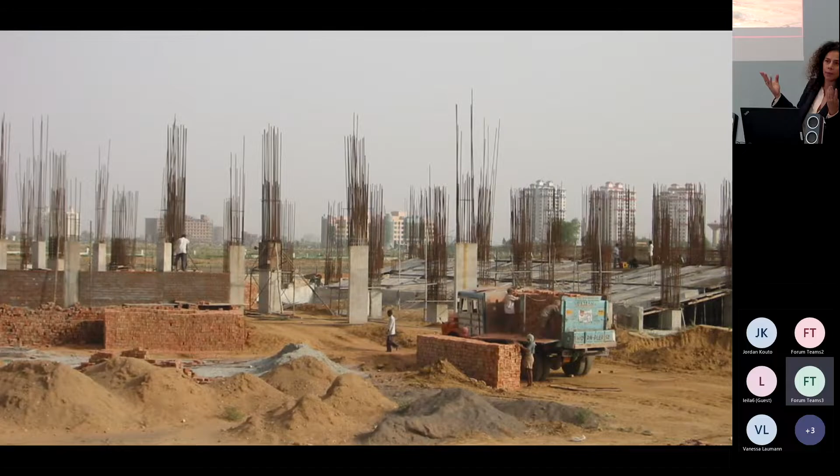What I'm concerned with now is all the knowledge - take this brick. The same brick was able to build huge castles, look at Notre Dame. It can build, look at the Duomo, look at Hagia Sophia.

If you look at the span or the heights we built in early New York buildings, if you look at Guastavino's work, what a brick was able to do. Today, a brick is only allowed to be infilled and then plastered over, as if it's a junky material that shouldn't even be allowed to carry any weight.

So these are the habits. When we look at them, it means humans have achieved some intelligence, and for some reason we are forced to be dumber than we are in how we apply things. That's what I want to ask.

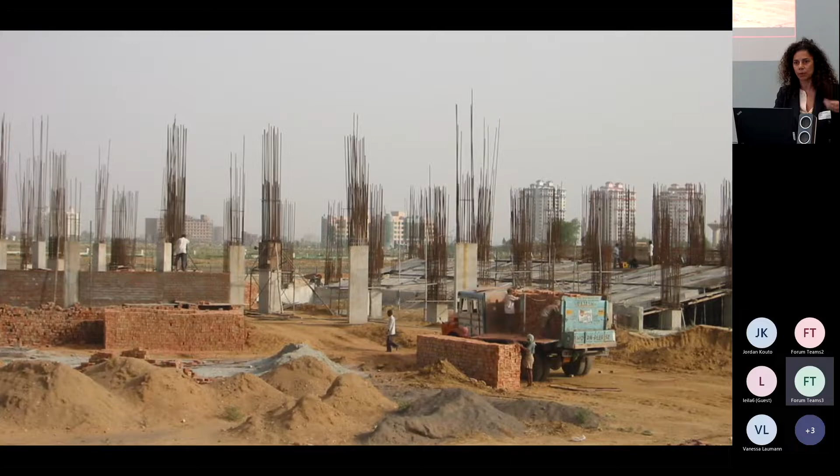We are in such a hurry to work and produce that I often ask, when I began my practice, what is the point of doing efficiently things that need not be done at all?

Maybe like during COVID, we saw that the damage got less. We didn't go to work, nothing happened. I mean, we got sick, there are many bad things that happen. But a lot of bad things didn't happen because we just were not allowed to do certain things.

So that should make us think - it's also funny, if you look at how we took something so seriously and found out it was not at all important. So let's be light about it and drop all the baggage, is what I would say.

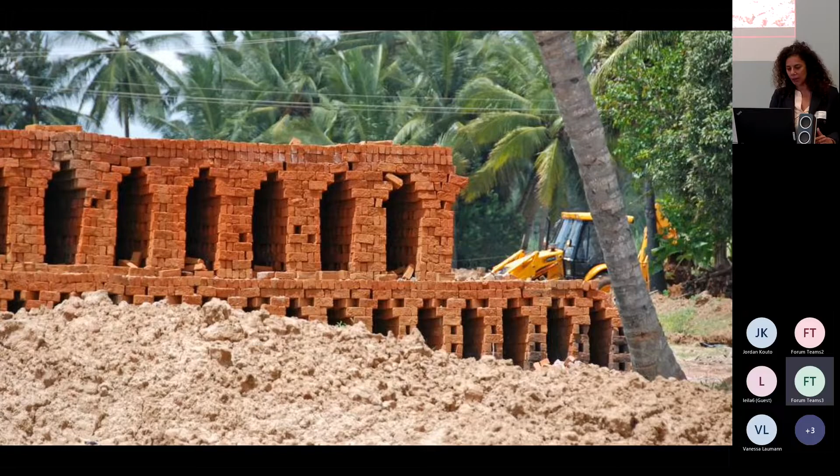I will just give an example now. I think I've used up my half an hour in the introduction. No, because I'm not such a big fan of prepared speeches - I like to be here and meet people and interact naturally. So when the time is up, we'll stop.

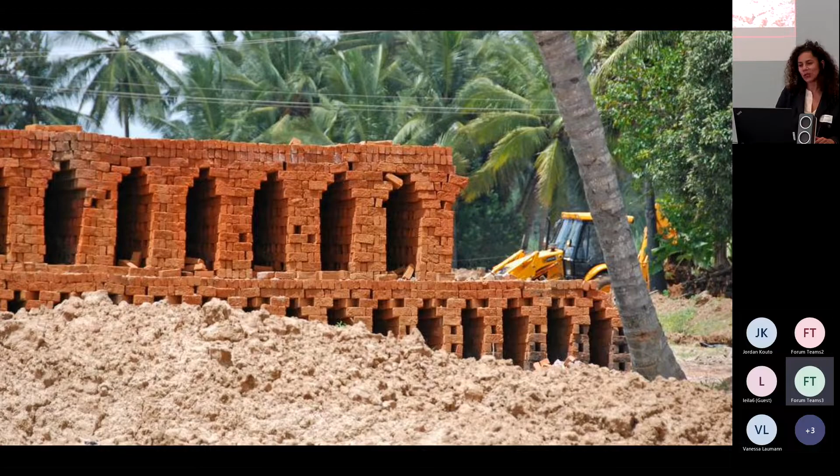So these are some things - when I started my practice, I graduated from school. We already knew there was an environmental crisis. This was in 1989, so we know how long ago that was.

I took the time to think before I act, and not to work in offices or do jobs where I felt it was not good for me, for them, for no one, and only for the sake of paying my rent. No, I'd rather live more humble, more simple. So while I downgraded my standard, my aspiration was very high. I started the adventure of what to do with the rest of my life.

Through that, I started observing - if I just take the material of brick, I studied many materials. I started looking at how brick is produced. When we look at production from an industrial catalog and think about how to rethink materiality for sustainability, the very first question begins: how is the material even sourced?

From where is the clay? What is the quantity? Sometimes I realize it's the quantity that's important, not just whether something is a good or bad thing. It depends how much of it you're doing and whether it's within human scale or not. So a lot of reflection, but I started realizing that no matter which material is produced, literally all materials are deeply affected by the territory from where it's sourced.

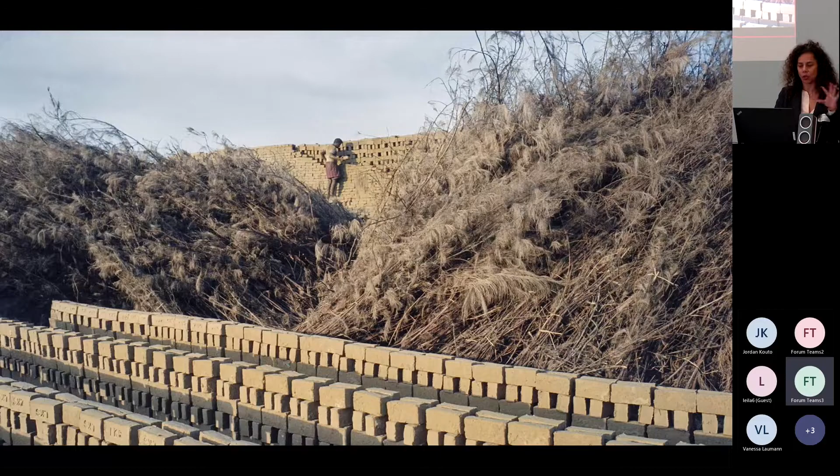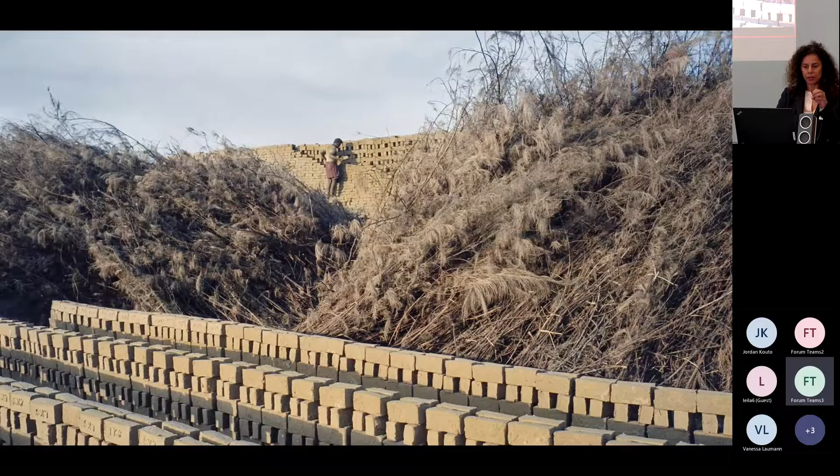So in India, for example, the clay bricks made by hand are made by the same people who are actually rice farmers. In some season where the clay collects, they will make bricks. In some other season, they are growing these kinds of plants to eventually take them as fuel.

So it's a kind of reforestation. And with the wood, not all the tree is cut, but the thinnings, which always have to be cut when you create a forest, are used. So there is a cycle.

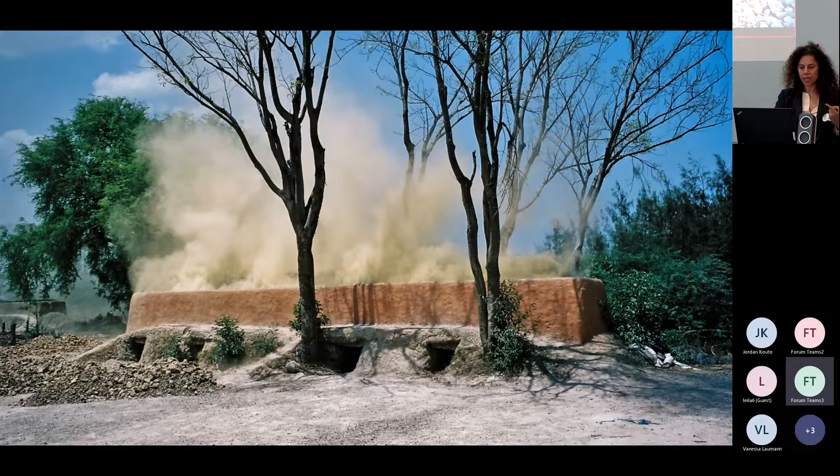Similarly, in lime making, there is a cycle of humans doing many different jobs in old civilizations to produce a product. A farmer's whole cost isn't just the 8 hours he worked every day, otherwise the rice would be too expensive. The same guy is also making bricks, also doing farming. There's a season, and sometimes he's doing this, sometimes that. Through all this activity, the economy sustains itself and the brick is available at the cost at which it is available.

And I realized that if you remove lime makers, if you remove brick makers, if you decide to use factory brick or Portland cement instead, these entire communities are wiped out overnight, because we got our architecture degrees and we are taught to prescribe a standard bag of cement as opposed to what is lying around.

So I think because we don't know how to use what is lying around in abundance and surplus - why? Because it takes time to use it. That's what I'm talking about, time as a resource. We would rather say, no, we have no time, because in the West, they created a slogan: time is money.

I really question this slogan. Time is our whole life. It's not that time is money - it's wrong to think that. In this society, time costs money. Suppose I help somebody for an hour, it costs that money. But that doesn't mean I should stop.

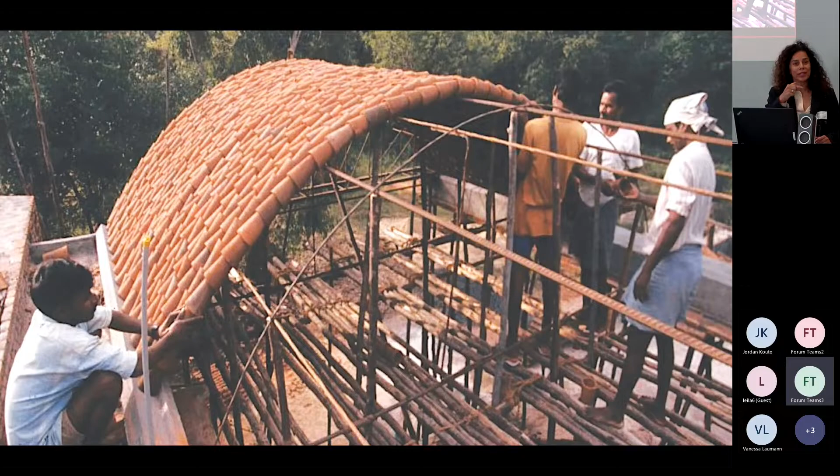The potters community is getting sidelined, losing their livelihood due to urbanization. Nobody wants clay pots anymore. But I thought if we can make building products out of the skills we have in society, it's okay if we don't use pots as pots anymore. We can make roofs with the knowledge that already exists, reinvent it, and produce highly insulated ceilings to give secure employment and improve local economy, producing material not just in factories.

For hundreds of years they were making things in the field. It costs nothing to just make. Of course, our standards may not allow that they work outside, but they are actually more healthy like that, not stuffy in a factory. They are outside their homes doing artisan work, and we are firing them with coconut shells and so on.

In the green building standards of the West, they don't differentiate when they say a brick uses XYZ kilojoules, whether it's coal or coconut shell. For them it doesn't matter - they are interested in quantity, never quality. I find it troubling, but it makes a big difference where you're taking the fuel from. These things should be seen holistically.

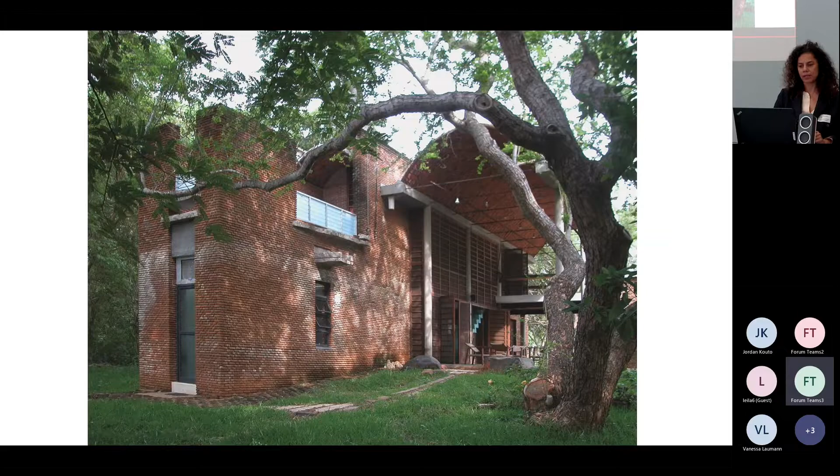With this kind of collaboration with masons and craftspeople, we produce some kind of architecture, and it's infinite what we can still do. Many people call it vernacular architecture because it looks like the colors we're used to, but actually these are highly engineered solutions.

I have even used the traditional pots which nobody buys anymore, but craftsmen still make out of tradition, for rice cooking, like a paella kind of dish. So I started using them as filler slab, like a lost shuttering - a Verlorene Schalung - for the concrete, which uses about 30% of the steel it would normally need.

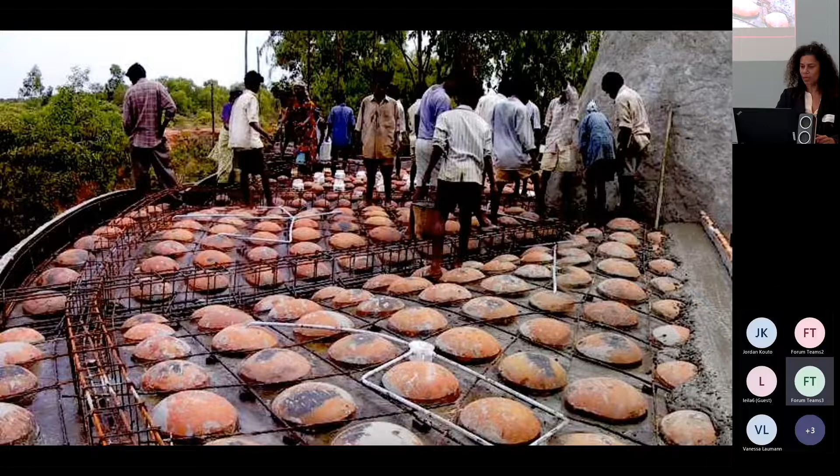So there are many kinds of things possible once you decide that if a modern solution is not good enough, we are not going to use it. If you just allow yourself to think for one or two more weeks in the design, what can we do? Each day we find ideas of what could be done, and then we follow it up with experiments.

So this is some of the architecture that I produced.

In the meantime, I myself lived very simply, because I had to reduce my costs of life. The more I gave up, the less I needed, and the more I actually liberated my time. Because if you're spending 60% of your salary on rent or paying back a bank, something is wrong in that whole calculation.

Many times we find it inconvenient to question the whole thing, because we think we have to solve the whole world's problem. I thought, let me just solve my own affordability problem and go from there one by one. Then I applied some of the successful strategies to other projects.

I stayed in a way many Indians, in very simple settlements, stay. But I had a motorbike, which cost more than the house maybe, and I had a solar panel also. Those were my two expensive high-tech things.

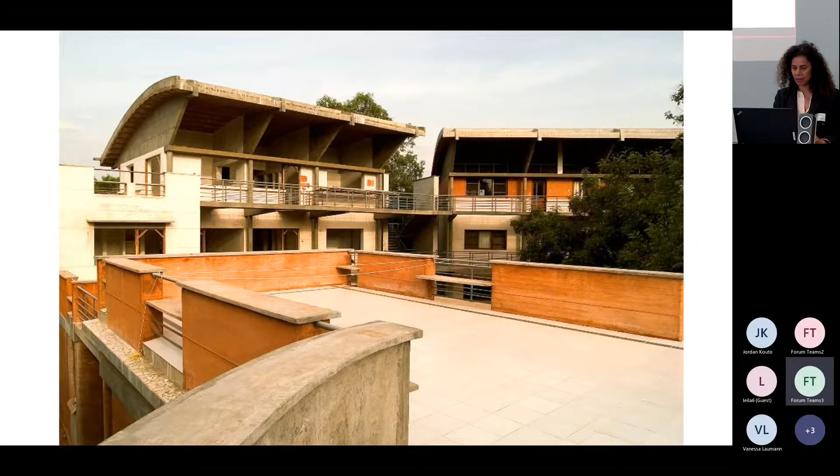So I have to go a bit faster, because I've wandered in unexpected directions. But I started using certain techniques.

I've investigated all kinds of materials that I've come across. This is an urban eco community, and I put the stress on the word urban. It's a co-housing, because I think the future has to be urban so that we can reduce distances, reduce sprawl, so that cities become walkable and infrastructure is efficient.

But even these, you see, these are terracotta roofs that are insulated, and they are partly prefabricated. There's a whole lot of things I did with those.

One of the materials I have been researching is called ferrocement, which is a more eco version of cement concrete. The engineering properties are very different, because in ferrocement you use thin mesh instead of thick steel. You can't just replace one with another, since they have different engineering properties.

I have been following up on the work of Nervi and a few others, who used the form—by using folded plates or bending—to make the form contribute to the strength, therefore reducing the weight of cement by making it very light.

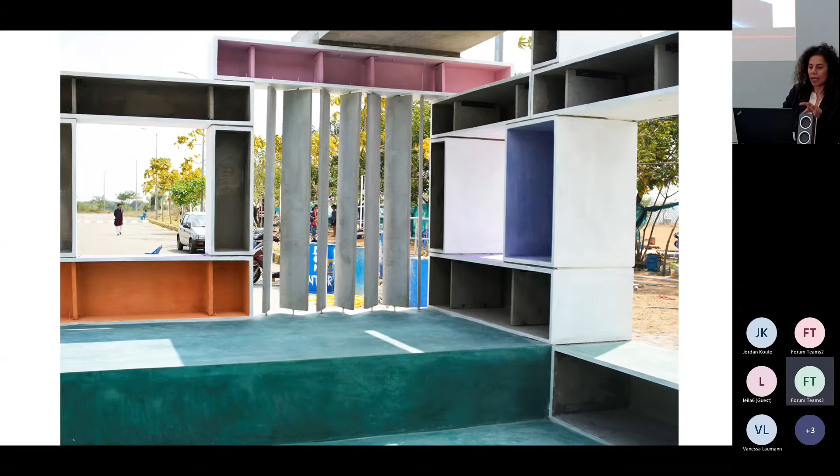And I have a couple of ideas. One is a modular housing system where colors are also embedded into the cement mix. Here you see some of that.

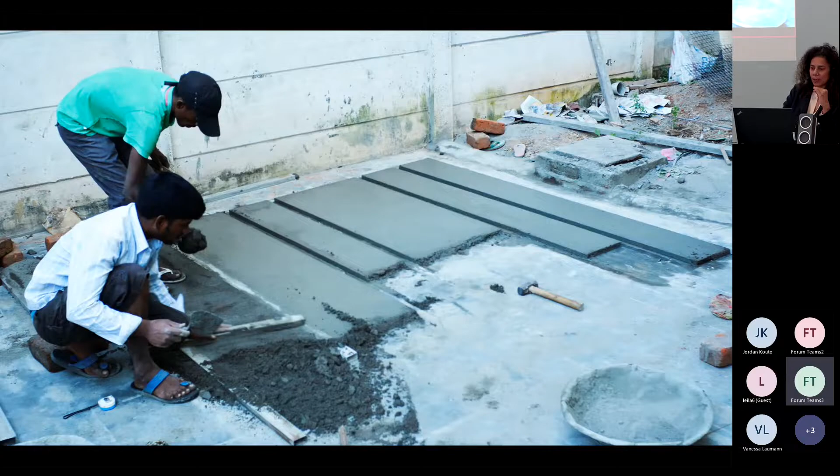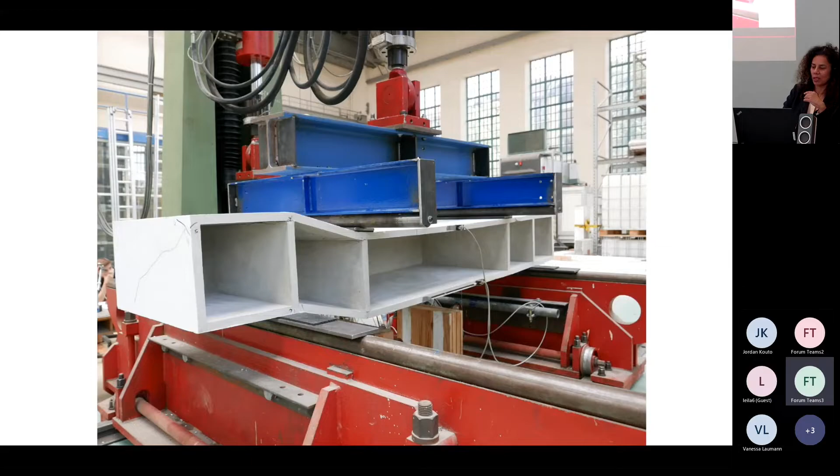Okay, so here are some of those kinds of things being exhibited and collaborations being done. This is Mike Schlaich's lab, where we have done some load testing, and we've been using this also for sanitation, toilets, and so on.

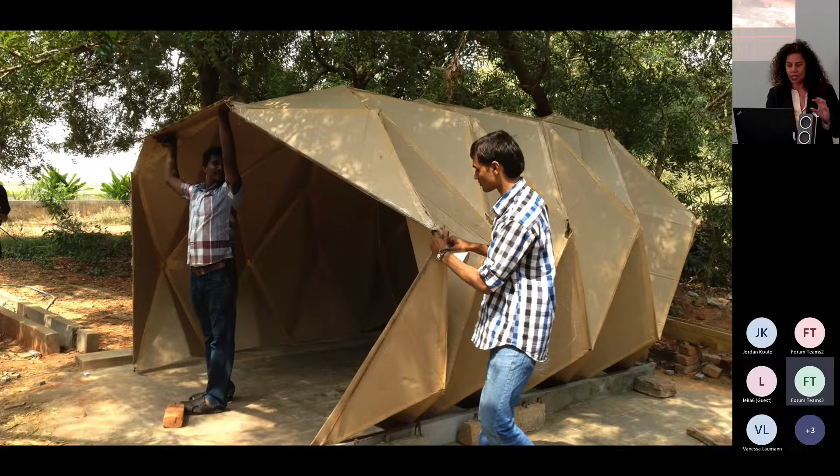As well as here you see—these are not factory fabricated, but using origami crease patterns to be able to cast, because these ferrocement materials are only 2.5 centimeters thick or less, and they can be cast on paper or recycled carton, since now we're using so much of this with Amazon. So this is one of the experiments we've been doing—how to use folded forms and apply very thin mesh and convert that into shelter.

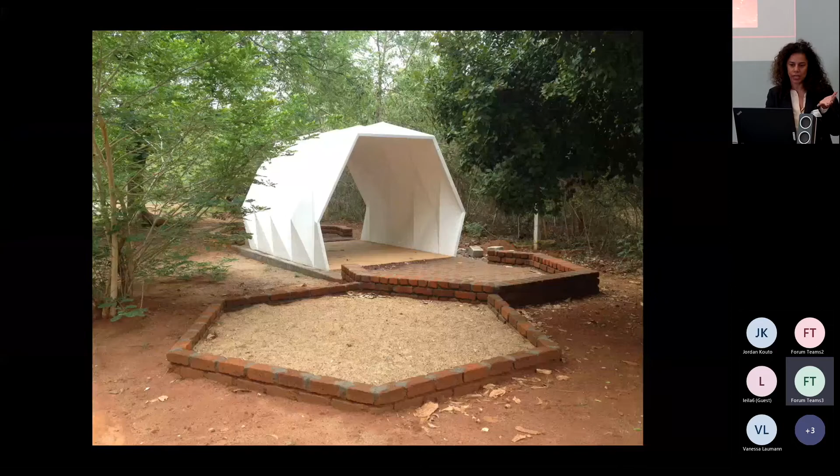So I will end with this. These are some of the new material palette.

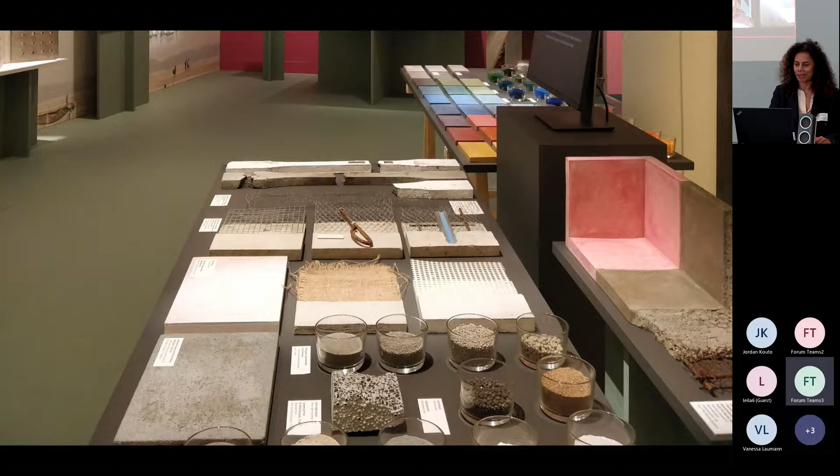The things I haven't shown you, which I had put slides about, are about using urban waste back into architecture, and recognizing architecture's potential to permanently absorb waste as we go along. Thank you. Thank you so much.

This has been actually exhibited at the Louisiana Museum of Modern Art when they did a solo show of my work, so that's not there anymore. But I have an atelier where some of it is exhibited, at Pastorstraße 50, here in Berlin.

Very good. I'm struggling with where to store all this. My work went into the art scene, and now I have to find support to store all of this myself.

Wow, so it's now in Berlin. So inspiring, thank you so much. And I'm pretty sure everyone has some ideas and questions about it.

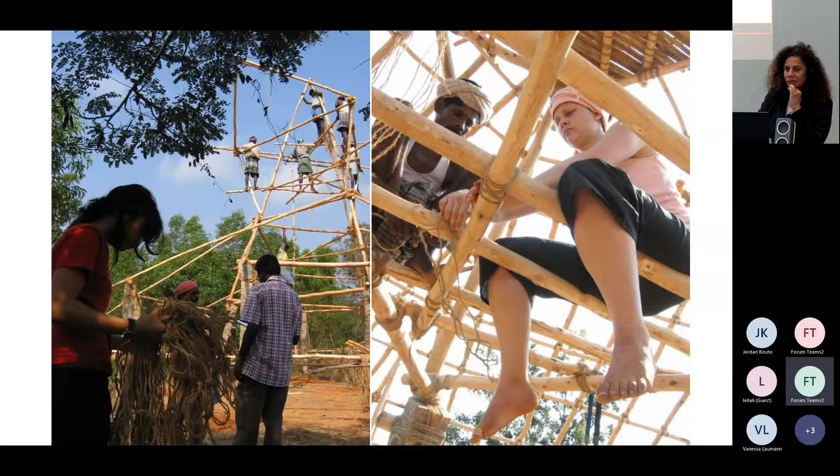Natureplus, as a standard setting institution, has very much relationship to standards. On the other hand, you have to say that standards give a kind of trust, because you have made it following a standard, so you should know what are the properties of this material. I understand quite well that if you have enough time and can learn from your own failures, you come at a certain time to a kind of standardized product. But isn't it easier to start with a standard and say, okay, the product must have these or that properties?

I think it is easier, but I don't think it's better. I think it's easier, and that's why we have it like that. Regarding trust, no matter how much ever scientific things are, look at the vaccine discussion - it's not like people just trust. Trust and mistrust is another philosophical discussion. I think people trust because they want to trust or not, and people trust also wrong things, or the other way around. I did not mean to criticize that there should be standards at all. I just mean to criticize blind adherence to standards post-industrial.

There has been an agenda - if somebody wants to come up with a new product post-industrial, they will do all the work and pay for it and work hard, and even a polluting vehicle will have to do that. There are a lot of people who do the hard work to make that understood and delivered. But sadly, all that we produced pre-industrially, which was also ingenious, because we didn't bother to do the same amount of work to make it a standard, in today's culture, people don't even know that it exists.

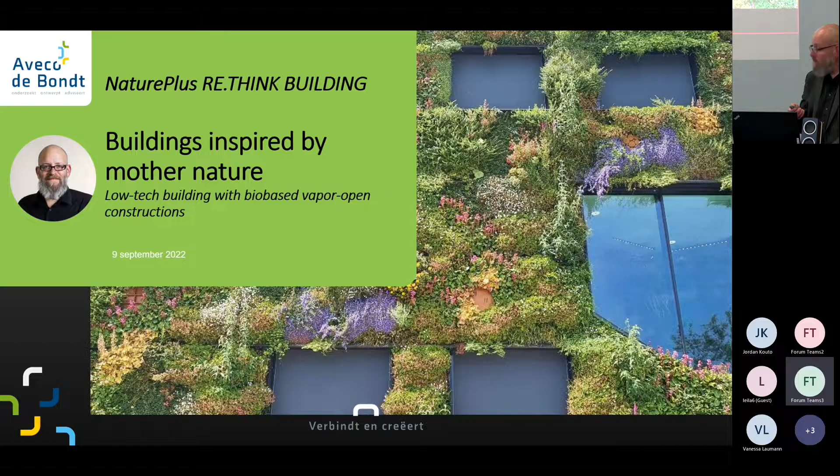I usually start my presentations with a special guest: Mother Earth, because I like her information that she wants us to be able to stay here on the planet, but it's not her choice, it's our choice. If we want to stay, we are welcome. So I like introducing it this way. Some call me nature.

Others call me Mother Nature. I've been here for over 4.5 billion years, 22,500 times longer than you. I don't really need people, but people need me. Yes, your future depends on me. When I thrive, you thrive.

When I falter, you falter. Or worse. But I've been here for eons. I have fed species greater than you, and I have starved species greater than you. My oceans, my soil, my flowing streams, my forests, they all can take you or leave you. How you choose to live each day, whether you regard or disregard me, doesn't really matter to me.

A little bit about us: I told you, with 30 sustainable consultants, we try to help 400 engineers and others in the building sector, to help 16,000 people working outside at the building companies from VolkerWessels, where we are part of—it's the biggest building company in the Netherlands. But we also work, through Aveco de Bondt, for all other building companies in the Netherlands, not only for VolkerWessels.

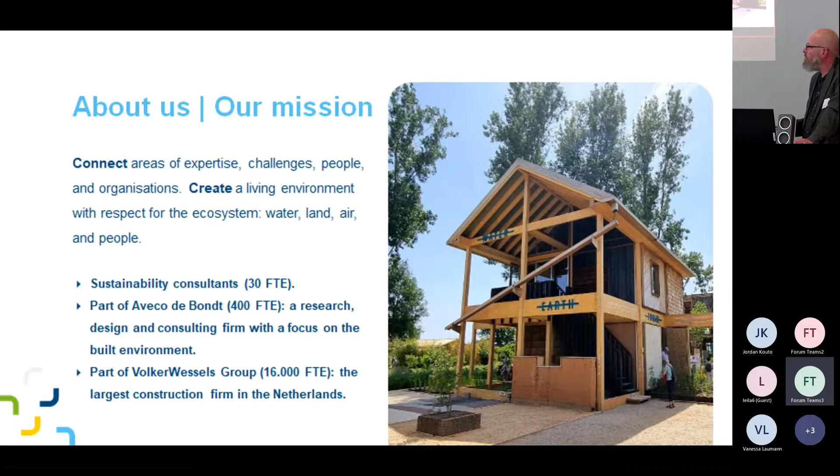Here are some projects, so I'll show how we try to change it. At the moment, the building sector has a linear process: someone begins by making a picture of a building, but doesn't think about how to build it. In Germany, architects make a picture and think about how to build it at the same time. But in the Netherlands we have two kinds of architects—one only for design at the beginning, and one who has to build it together with the building company.

They work at the building company together, and we're thinking we can't keep doing it in a line anymore if we want to use more bio-based materials, materials that are good for nature. We started four years ago saying we have to put everyone who builds together, from the beginning, at one table—we call it a circular table—so that from beginning to end they plan the building together, not in a line. In a line, you get a problem.

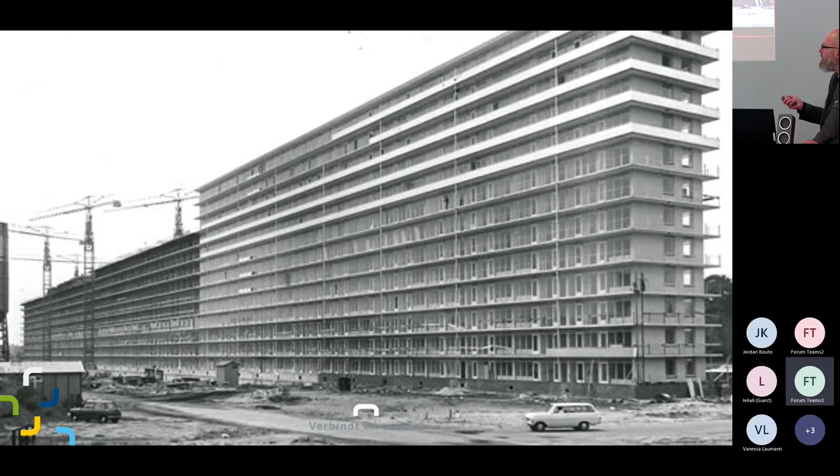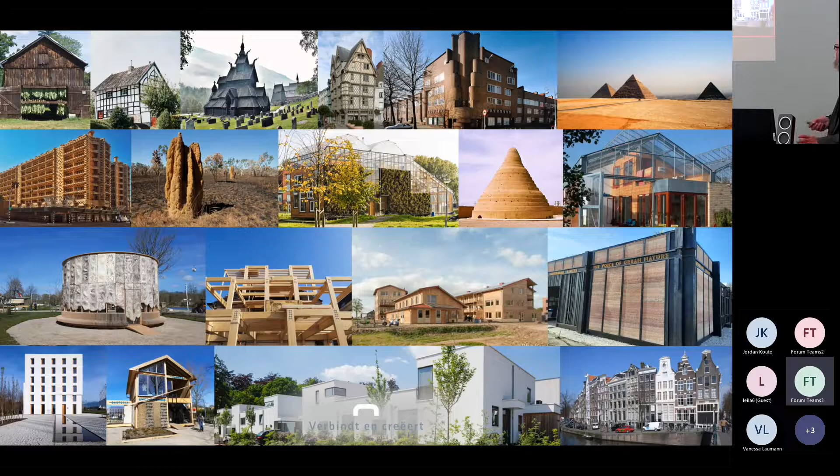I often said, these are for me buildings. They are in Amsterdam, 400 years old. This is the tradition of buildings, not what they did with concrete. Old houses, 400 years old, are also completely circular, and we could reuse it if we wanted to, but it's monumental, so it's not possible to reuse it.

But it's bricks together with lime mortar, so we can use all the bricks again. With cement mortar, it's not possible to use the cement mortar, or to take bricks from a site and use it again. They knew this after the Second World War, all over Europe—we take the lime mortar off from the bricks and build with the stones again.

So it is possible. We also have really old houses, and this is also something I want to say: these buildings are all diffusely open, or vapor open construction, with the construction regulating humidity, water in the air. Humidity regulation and heating regulation—so we can use the old materials. They are all diffusely open buildings, and the old architects knew to use this principle from nature.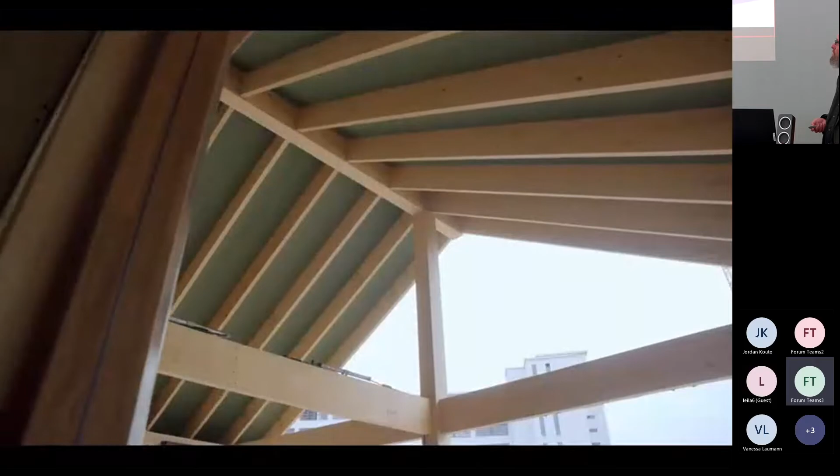It's only a short film. If you want to know more about these materials, you can find it through the Exploded View, but also on your page, or Sissy—on your page there is also information about all the materials. Yes, absolutely, on biobasebouwen.nl.

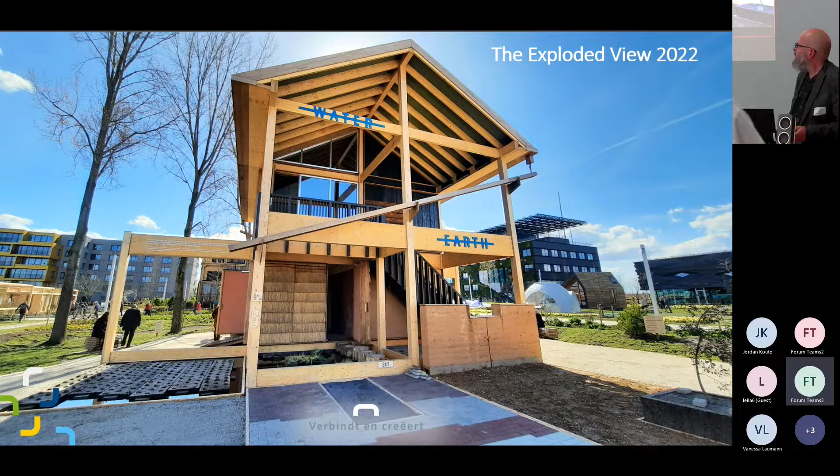I will introduce a little bit some materials from this pavilion, because I heard there are some colors, blue or other colors, so they are not repeated every time. As a building biologist, I'm also looking at how to make colors through bio-based production, and we have here some colors.

We go one step further. If you look at this material, the blue one, this is a plate for outside, and the color is made by blue algae—something we don't want to have in our waters, but if you take it out, you can make a really nice blue color. This is what the smaller startups are making.

They try to use everything we find in nature, also things we don't want to find in nature, and use it in products. And we have plates made from tomato plants and paprika, making a plate you can use in place of a wood plate.

They get the plants for nothing, because the big companies in the Netherlands have to pay to have it thrown away, and they can pick it up for nothing because the company doesn't have to pay.

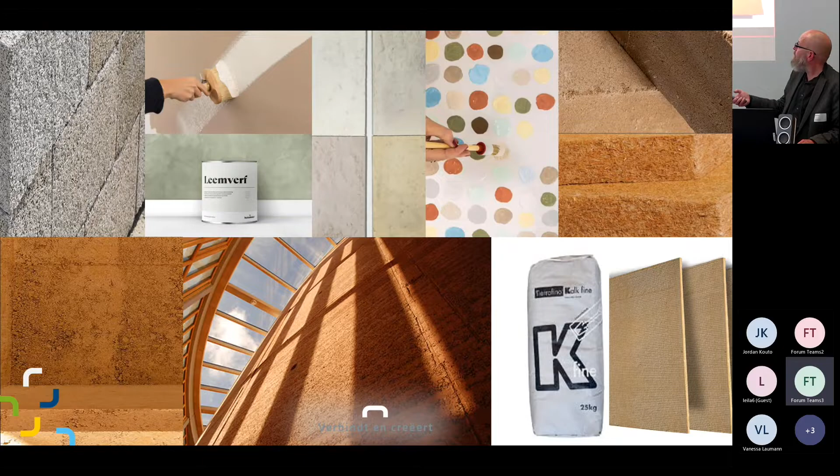But what we also do, and I heard this earlier upstairs, is we look at the whole life cycle of the building. This is only an example for the life cycle, from production of the materials, to the building, but we also look at the 50 years of use, how much material you have to change, how much energy it costs.

So we have a system, if you want to build a house in the Netherlands, you have to show this before you can start to build. The government asks you to give a price for 1 square meter, but the price for the square meter is the impact for nature. We have to show this before you can start to build.

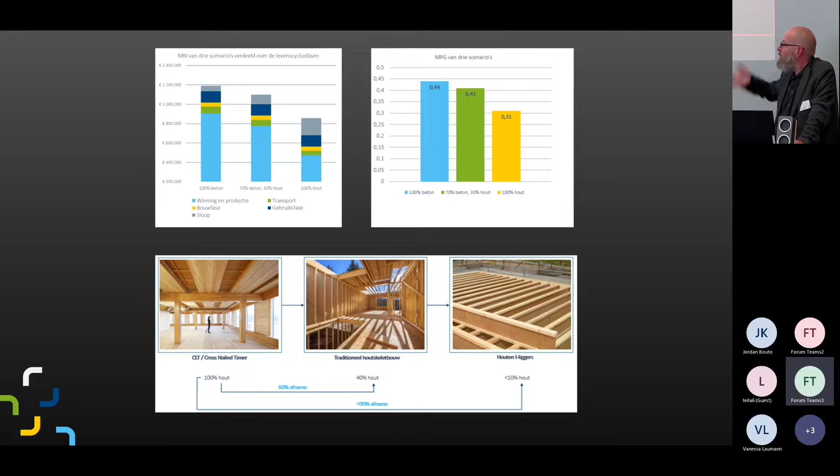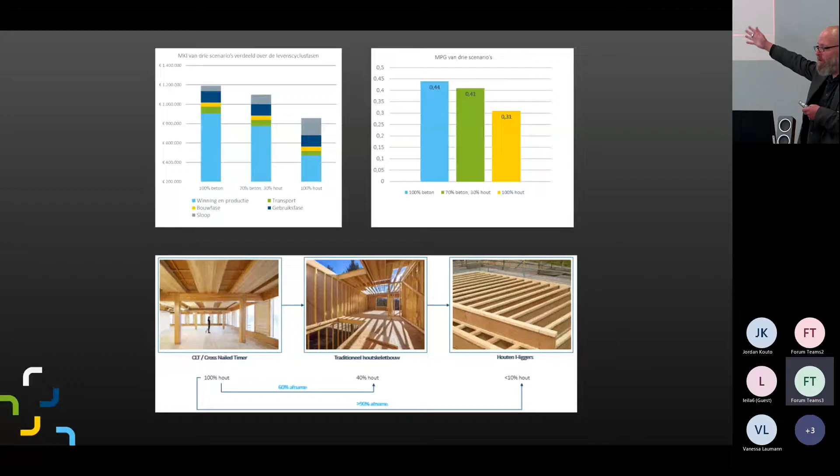It's the same as the construction in the middle, or you can also build the whole building from it, but not if you want 14 levels - that's not possible. But at 4 or 5 levels you can build completely in this system. Two more minutes because of the Q&A afterwards. Two more minutes, okay.

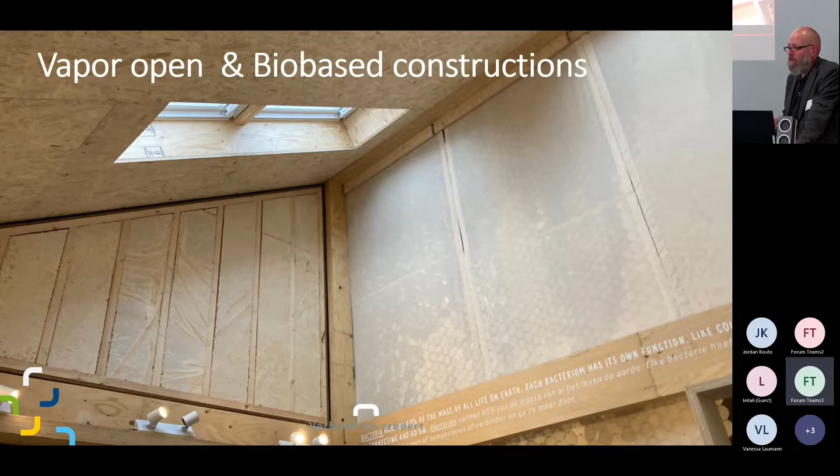Next, that we are using so much more bio-based materials and bio-based constructions. We also look at using the principles from nature, so we come to buildings that don't need installations - we only need ventilation, we don't need heating, we don't need aircon in the summer, because the materials work with you in your building.

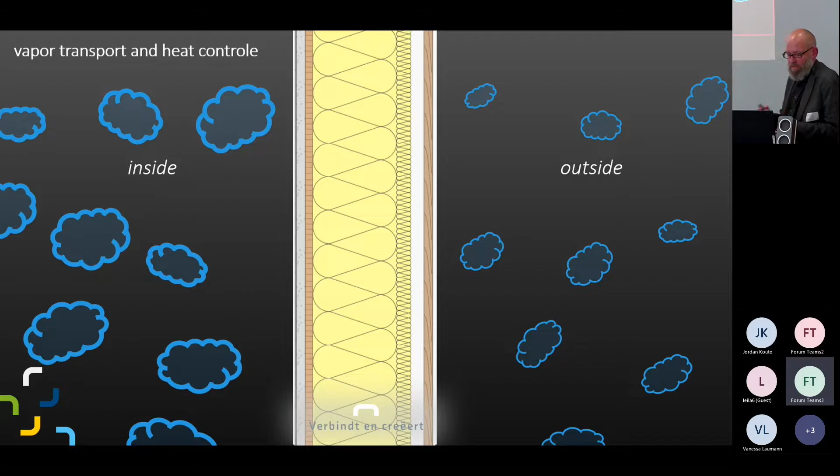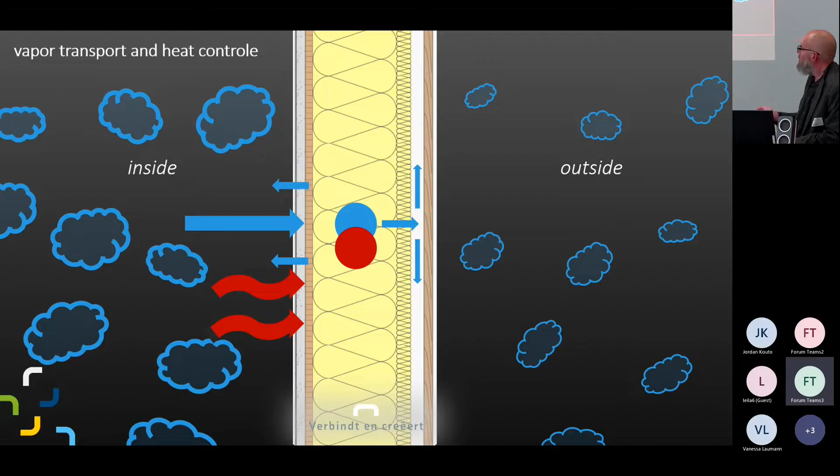So I'm going a little faster through it. If we say open construction, inside and outside, here's how it works. If there's too much humidity inside, it goes into the construction, stays there for a time, then goes outside. Sometimes if inside you need more humidity, it gives it back to the inside. This water in the construction also takes heat out of the room in summer, so you don't need aircon because the materials work for you.

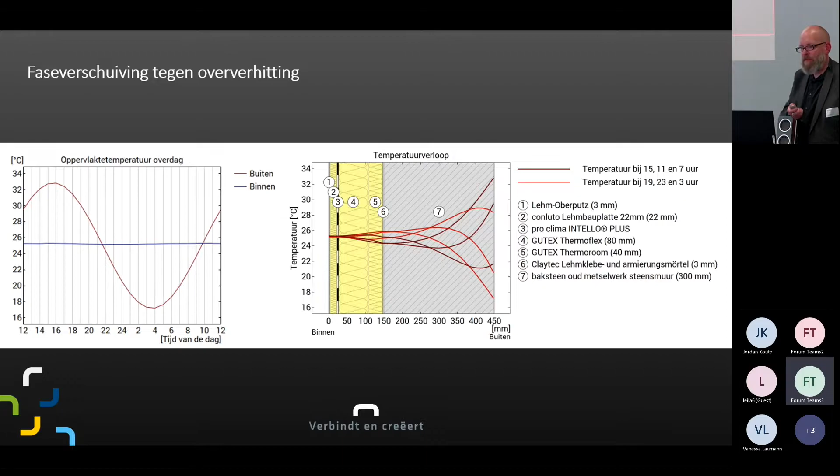So I'll go a little bit more. We can simulate this with some programs, together with the Fraunhofer Institute. We can show this before we build it, using the climate data from the last few years. There is something like this.

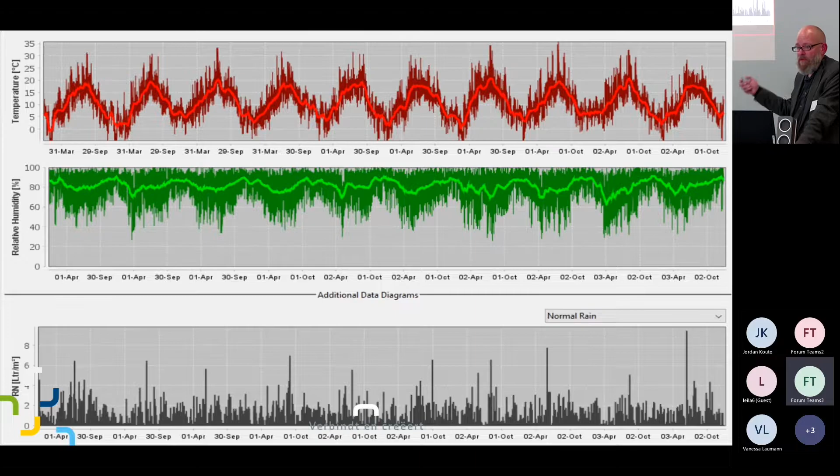Then we can show there's no heating, and there we don't need aircons in the summer, and we don't need ventilation. We can do it the nature way.

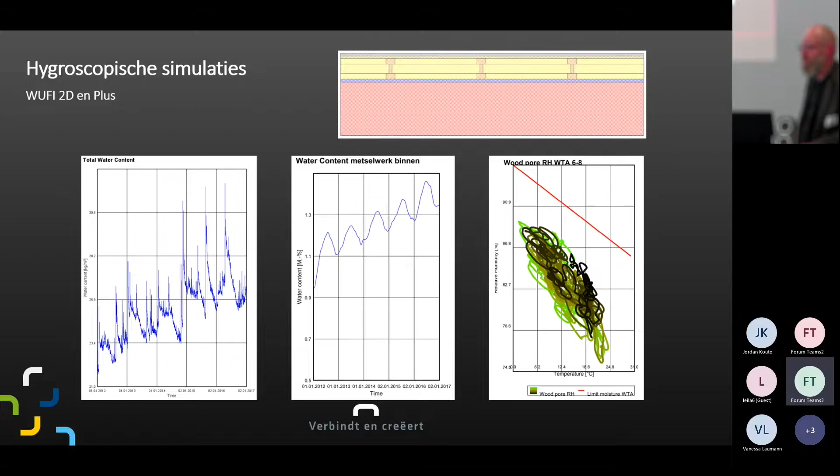So this one is for water in the air. This is a really nice picture, looks like from China. Every line is one of the 10 years, and not coming over the red line, so everything is safe in this building with water in the air. That's an innovation step, but I'm going faster.

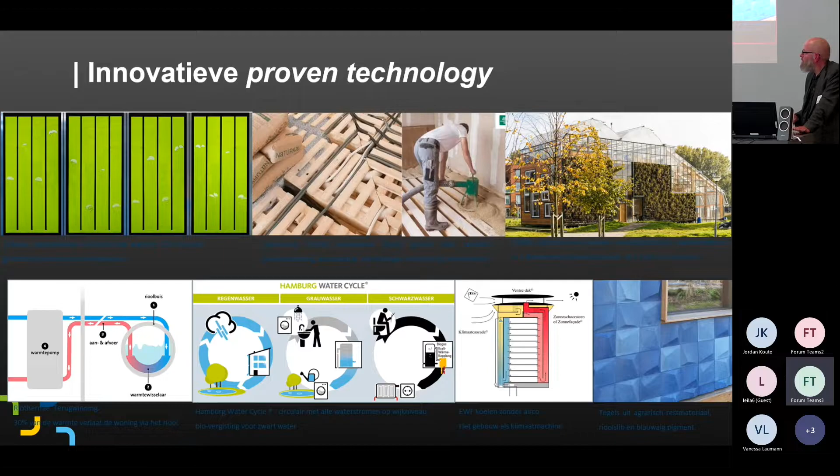So we're looking also for innovations, IoT panels, and using water so much more, how much possible, recycling, reuse. This is one building in Österreich that we like to bring to the Netherlands.

We are also looking now at the climate data from Netherlands and Österreich. This is a building in Österreich without ventilation, without heating in the winter, and without an air ventilation system. Only these wood panels can open and close if you need fresh air inside, and you can do it as a user, but you can also say, building, do it for me.

So the building does it as well. I think it's in Lustenau. But if you are looking for the building, the architect gave the building a name, and this is 2226, by Architect Baumschlager Eberle.

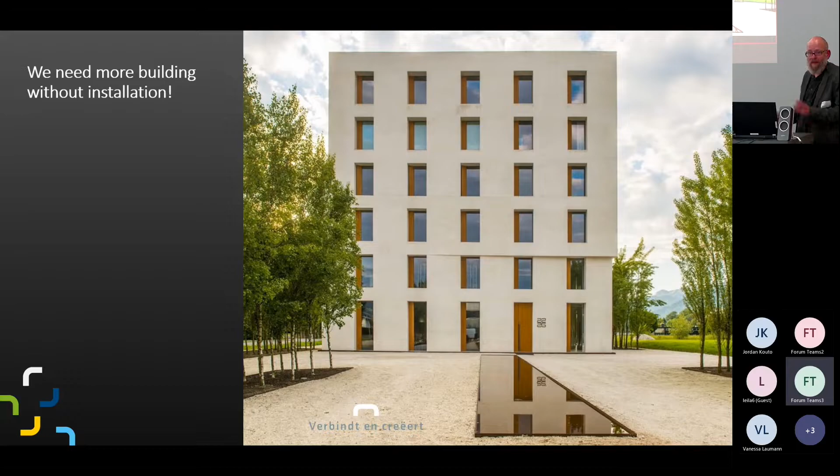The building stands in Vorarlberg, in the most western part, and the second one is near in Switzerland. So if we want to have it here, but under our rules from the government, it's not allowed at the moment. So we have to look for it.

Yay. Okay. Thank you so much.

That's what we are doing in the Netherlands at the moment. We try to build with bio-based materials to get the CO2, the carbon footprint, down. Thank you.

Are there any questions also from the participants online? Did we have any questions in the chat? Yes, Ira asked what the building is called.

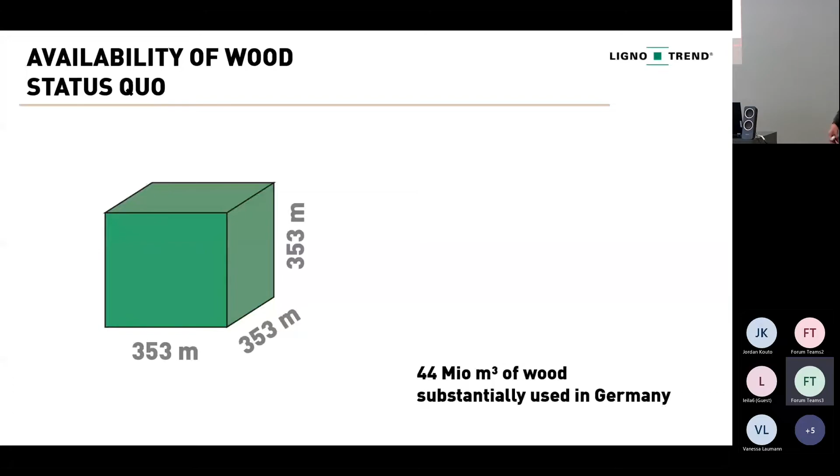But is this the amount of wood that is available, or is it the wood that is being used? That is being used. Next chart.

I'm on the national scale. Yeah, it shows me that you're very into my presentation.

That's good. I'm talking about the German scale, but obviously you can do that on the international or European scale, or look at other countries. It's just to give you an idea about dimensions.

So the forest inventory of 2012 gave us that number: 120 million cubic meters are newly growing each year. If you see how we use it, about a third is substantially used, and another third is used for energy wood or the paper industry, or just burned, which we can take into account regarding carbon storage.

And where is the third third? It's left in the trees, in the woods, in the forest, which I find is good for ecological reasons, or we just can't get it out because it's steep mountains where this wood grows. So keep in mind that cube, the 44 million cubic meters.

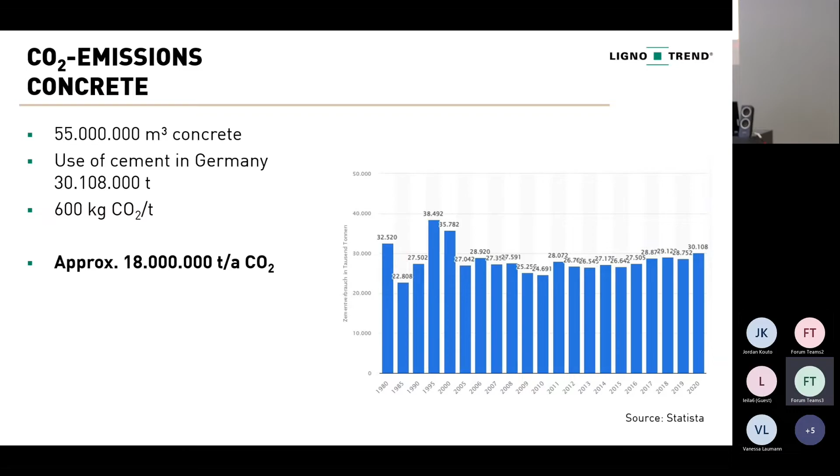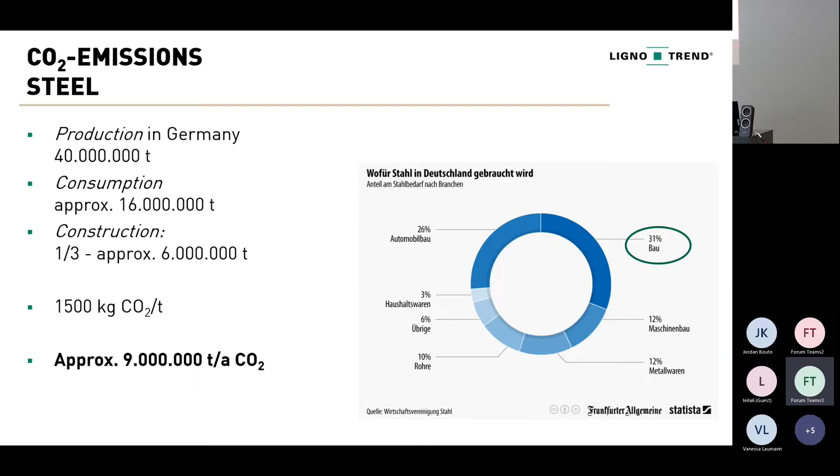Steel is a little more difficult, because steel is used in Germany for automobile production and everything. A third of the steel consumption in Germany is used in construction, and you can do the same calculation, where we add 9 million tons of CO2. We didn't investigate masonry, glass, aluminium, or all the technical applications we install. We've seen these charts in the morning - this is why the building industry is really relevant for CO2 emission.

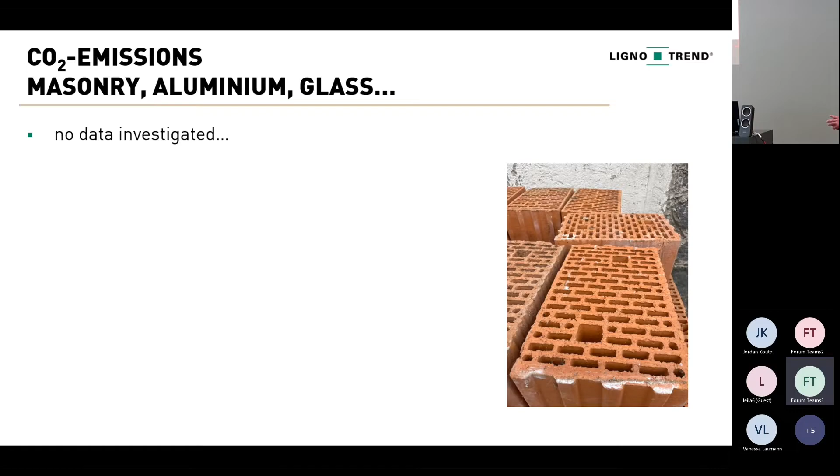And what does wood do? Wood is capable of storing carbon, and it stores between 900 and 1,000 kilo per cubic meter. So these 44 million that we substantially use - not the quantity we burn again or use as paper - will store 40 million tons. This is where I understood those scientists who say, okay, we can build ourselves out of the climate crisis.

But now, bad news. Perhaps you have heard this discussion about whether we can take this storage into account - if a building is torn down after 50 or 100 years, the CO2 will be freed again. Well, let's build them so they keep the CO2, then it should be okay.

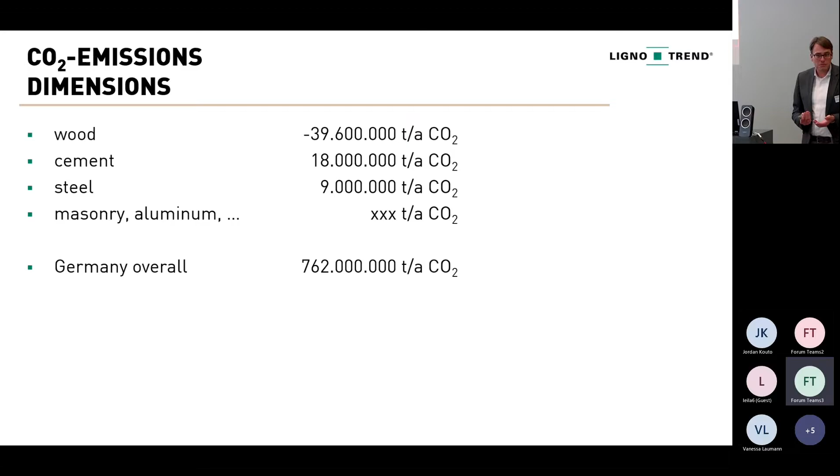Further investigation brought me to the topic that we have another 25% of CO2 emissions. These are CO2 emissions going down at least a little bit, so this is the third that the building industry is responsible for. So energy consumption for the use of buildings is obviously also a high potential. And then we have a third we can work on.

So why shouldn't we do that? This is my optimistic side. If we have a potential of 10 to 15%, let's address this potential at least, because everybody else will also address it. Does anybody know what the yellow part here is? It's very much mobility in there, industry, everything else, our consumption.

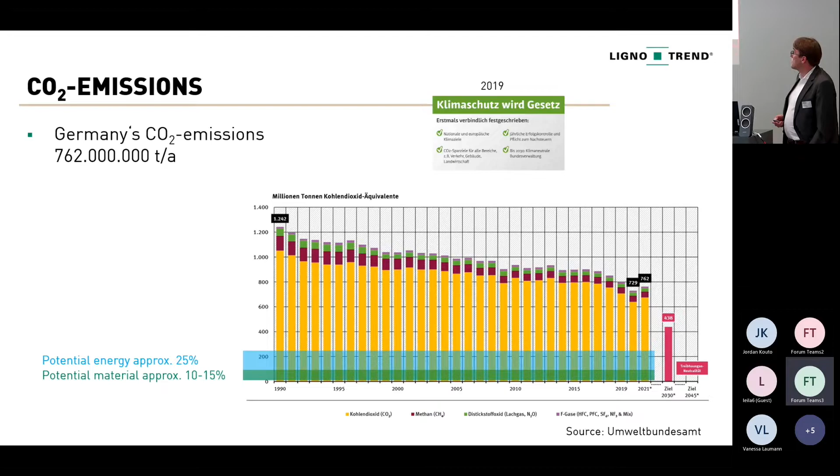Of course, let's focus on all shares. I found it very good that we had this keynote this morning where things like—what did you call it?—the mindset was addressed, and it's really the most important thing, of course. Metanoia—yes. That's my word of the week.

Okay, so now we have these two numbers, and we have hopefully a little idea on these dimensions of what we talk about. Now, chances and the magic word: 50%, another number. I won't ask you now. 50% is the vision of many of the timber actors in Germany—50% of buildings made from wood.

It's a vision, they want. No, it's a vision. But one way to do 50% in wood is to not build anything—then the wood goes up, for example. That's a good idea. It's a really good idea. No, it's different, what I want and what is the vision. If you want to have that, I would say you're crazy, you're nuts. If it's a vision, it's okay.

In my role here in Berlin with the Bund Deutscher Zimmermeister, I'm in a gremium there, and we always get the statistics on the quota of timber building. In Germany, we are in residential buildings around 22% now. In commercial and public buildings, it's, I think, a little bit more. Well, let's say at the moment 20% of buildings are built with timber.

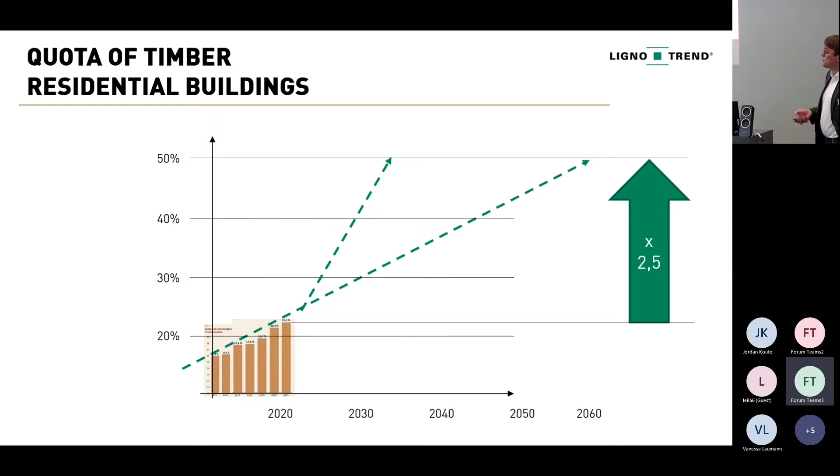This is almost what we need to do here: to almost double with the same material. I don't want to tell you that we're the best here—there are the yellow colleagues in the atrium who started to do the same now. We've been doing it for 30 years now, for other reasons—in 1992 we did that for other reasons. Now we feel, well, it wasn't so bad, and now material efficiency fits to that.

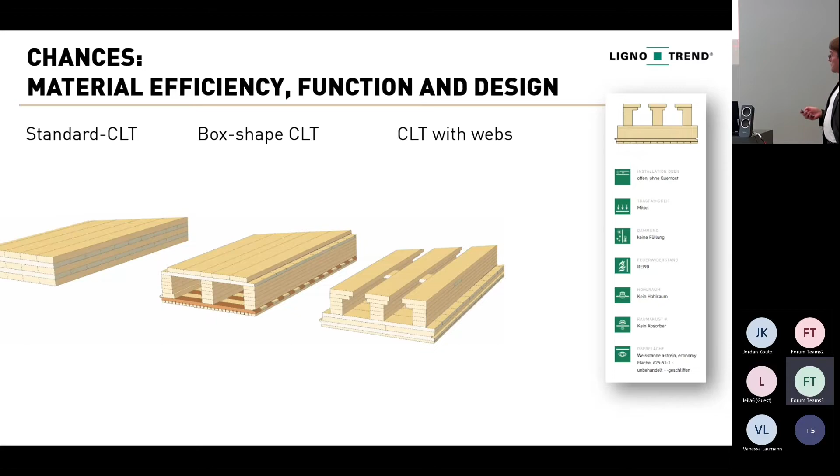What we do on a technical base is always ask what performance is needed for a building, and reduce material as much as possible where it's just not needed. It would take too long to give you examples for that—if we can talk about that in the break. So let's individually configure to our real needs.

Magic word number two: substitution. And here we come to carbon storage and CO2 emissions again. If we cannot store more CO2 in wood, because these 44 million cubic meters—let's say these are limited—we must look at the other building materials which emit CO2. So if we build the same number of timber buildings with wood using half of the material, we gain material for another big share of buildings that now can be built with wood. That's substitution: the replacement of fossil-based material, or of materials that emit CO2 in their production process, is the second very simple solution.

Create as much square meters from the cubic meter of raw material, and I added here where reasonable and possible. Of course, there are products, if you look at steel, brick, that also came to material efficiency by inserting holes and everything like that. Steel, the I-beam, is something material efficient.

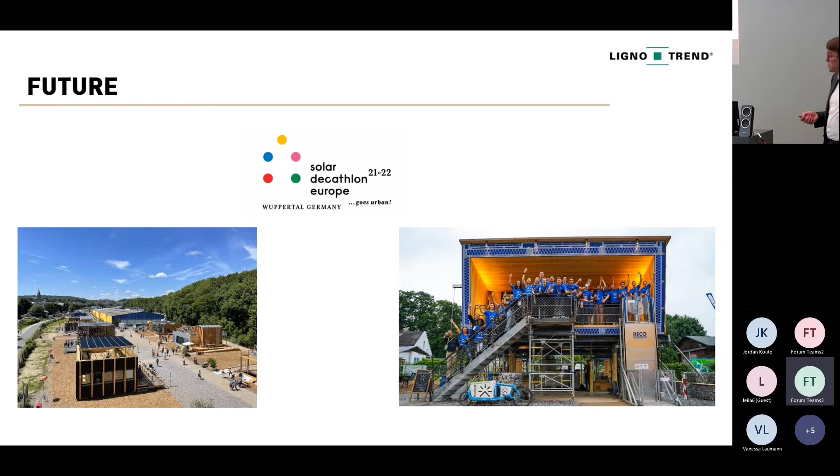We have, and I'm sure you know this, these definitions of sustainability, which natureplus also promoted. A new definition is sufficiency, efficiency, and consistency, which I find much better than the old economic, ecologic, and social aspect. It's better because it looks into the future, and the circularity topic derives from this. So more efficient, more regenerative, and if possible, reduced. That's the topic of mindset.

My last chart, because I observe that people are hoping for one big solution to solve all our problems in the world. They point at each other, saying you messed up because you have more emissions, and we have less emissions, and Germany is so small, we are only 2% of CO2 emissions, we don't need to do that. I think we must be aware, as most of you will be, that this is a big puzzle with small parts.

And everybody has to take his individual responsibility for that. No, the word for responsibility is accountability. Accountability is better, I had already written that. Accountability—this is how I want to stop my presentation.

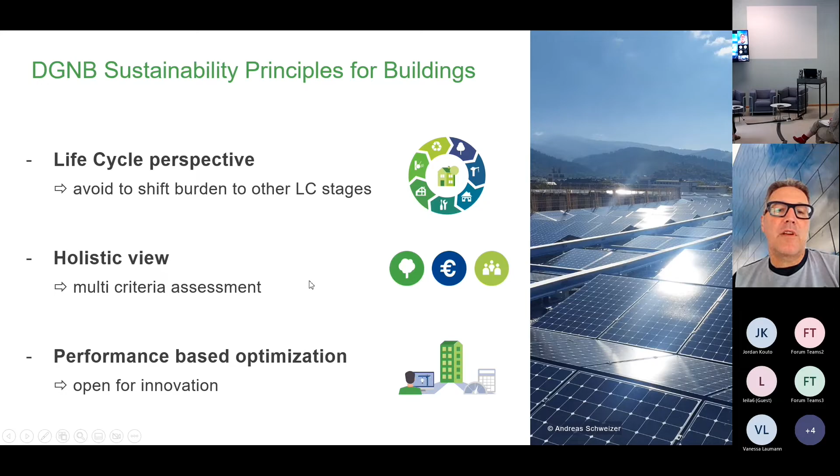For that reason, we have discussed and defined so-called transformation topics, which are the foundation of the future certification framework of DGNB. I want to go into these because some of them are really important for products and materials. The first one, energy and climate, is clearly very important.

We have already discussed that we have to slow down climate change quickly. But in the same way, we have to support the transition of the energy system, because we will always need energy. This is not the problem as such, but without an energy system which can support the building sector with renewable energy, we will be in trouble.

That's clear. So we won't have autarkic houses, self-sourcing all the energy on the plot. You can do that in the countryside with small buildings, but you cannot do that in dense structures in the cities.

Secondly, very important for the future are open spaces and ecosystems. These are topics we have not looked into intensively enough in the past. We looked very deeply into the building itself and what's going on there, but the effect of the building on the environment, and vice versa, we didn't study deeply enough.

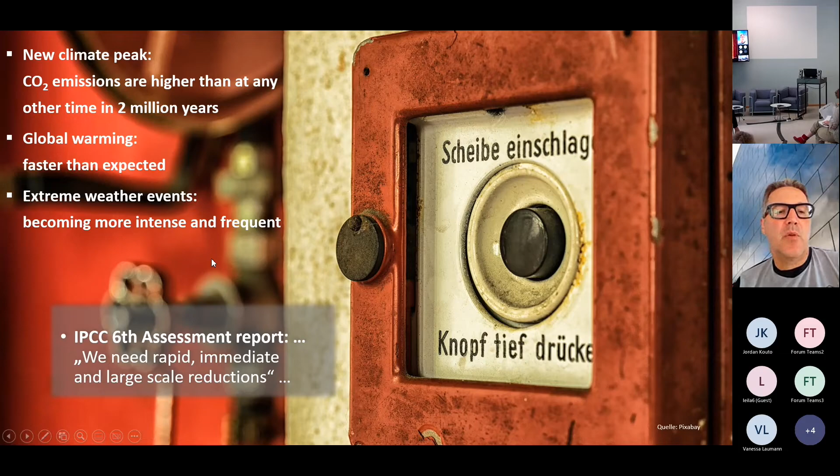Regarding the earlier comment about what India should do - building with wood is not the solution in a country like India. It's completely clear that we have to give answers that are compatible with the boundary conditions of each country.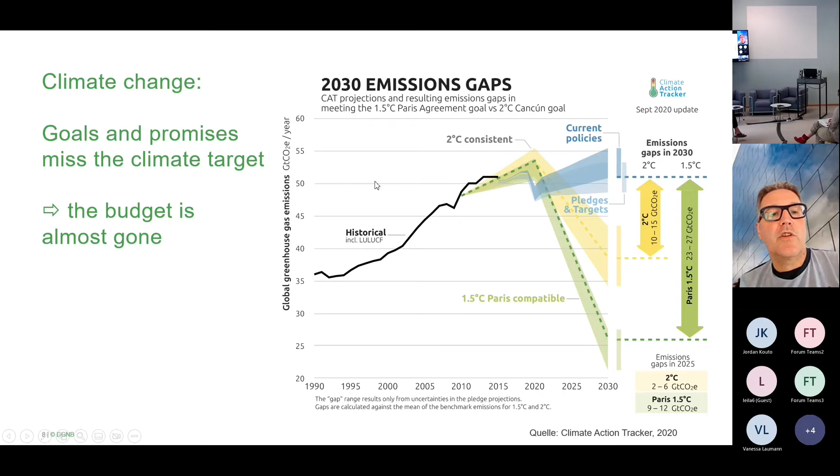Coming back to the carbon emissions of the building and the building life cycle, we see building materials. So what do we include? We include the production of building materials and construction, the replacement, the building operation, and disposal and recycling.

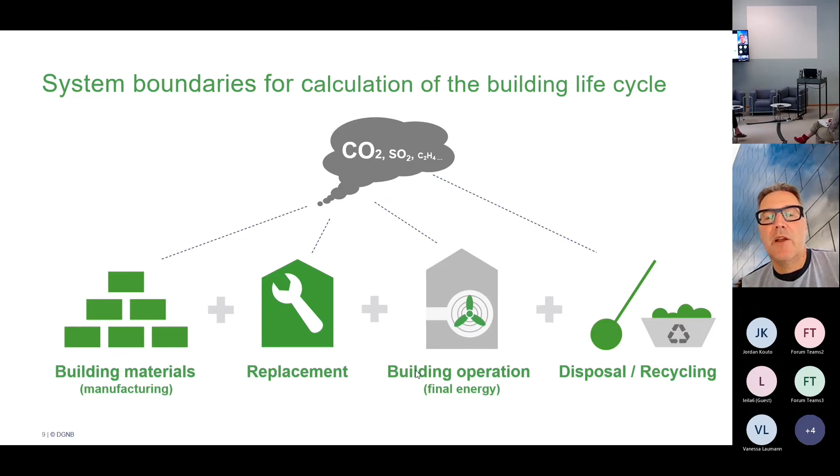In this field we have two big blocks. The first one is building operation, and I put together the other into construction related. If you look into the DGNB reference building in the certification scheme, we see a 30% construction, 70% operation split within this reference building.

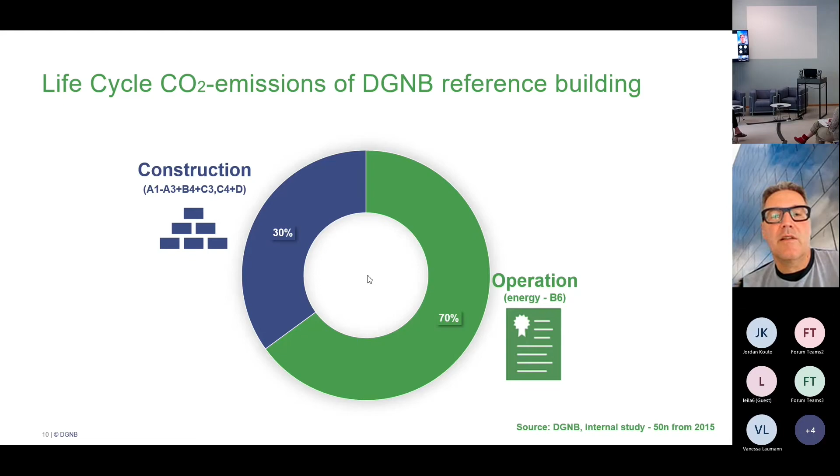Why is it so? Because it was state of the art, or still is state of the art. We are not good enough in operation with what we are building today, with a 50-year reference service life.

If we go into the Efficiency House 40 standard, which is quite good today from a building envelope point of view, but it's not only building envelope, then we have a 50-50 relation between construction and operation. We're coming more to the point where we should be, because in operation in the future we have the innovation issue where we will have better solutions. The 50% of construction is spent today if we have a new build.

If we talk about an existing building, this is already existing. So talking about renovation, we have to look maybe at one third of this, because two thirds is the building structure as such. So if we renovate the building, we can already bring down a lot of this carbon emission.

For that reason, we have defined in the framework for carbon neutral buildings so-called focus areas for optimization of the operation and the construction stage. I would like to start with the operational phase, because here it becomes clear that we cannot give one answer for all buildings.

The first focus area is the local context. If we talk about an existing building, this is not accessible because the building is already there. So we won't change the surrounding of the building to have a better local context.

Secondly is the building envelope, and this is one of the very critical ones in the existing building stock. We still have about 7 million buildings built before 1979 in Germany, meaning before any energy performance requirement existed. That means there is a high share of the building stock where we have to work, which is from a building envelope point of view not good enough for the future. 7 million buildings is a lot, and here we have to optimize.

But there are instruments existing; we are just not fast enough. So we have to bring up the renovation percentage.

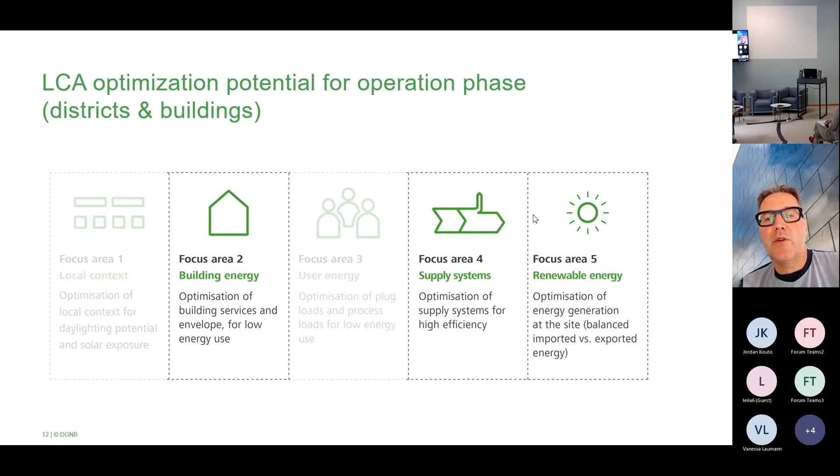I was cheating, it's not the second last but the third last slide. This is the result of a study we did about the emissions from building components in new buildings, only from the construction stage.

Here you can see there's a high variance between almost 0 and more than 15 kilogram CO2 per square meter year, with a median average of 8.8 kilogram. That means the way the building is designed and built is relevant.

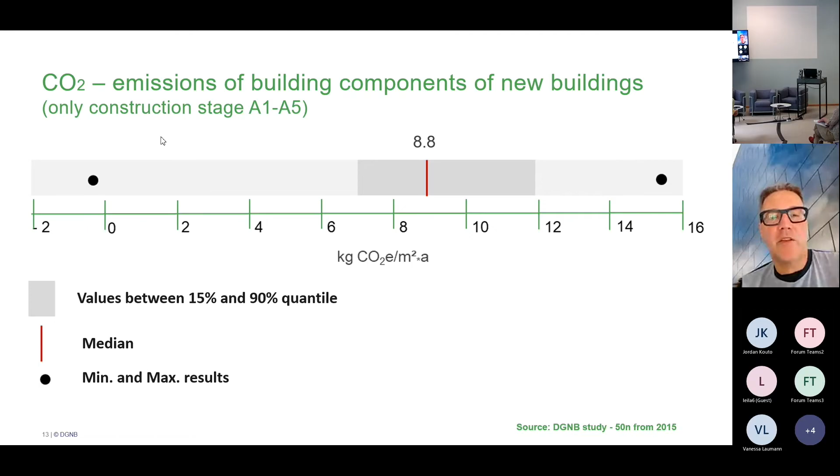That means if we can bring down the 8.8, either by using low carbon material or by using existing building stock, we are working in the right direction. For this part, we have also defined this focus area.

And here, the key elements are the last two: low material consumption, which was discussed before in the panel, and low CO2 intensity of the material.

This is not necessarily wood. It could also bring down carbon emissions from other materials, but the problem is that it's not available on a large scale today.

So in theory, you can do steel with hydrogen from renewable energy, but you neither have the renewable energy in a big enough amount, nor do you have the facilities in place for that. That means you need at least another 5 to 10 years to have the first material in place.

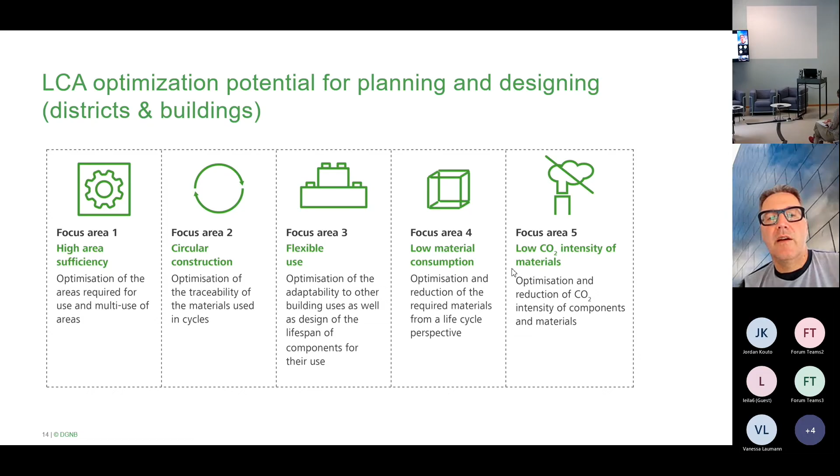And if we look at the slide we were discussing about the emergency, that might not be fast enough. So the conclusion is clearly, we have to think if we can build as much as we do, we have to use the existing building stock. And when using material, we have to think about using less material and using low carbon material.